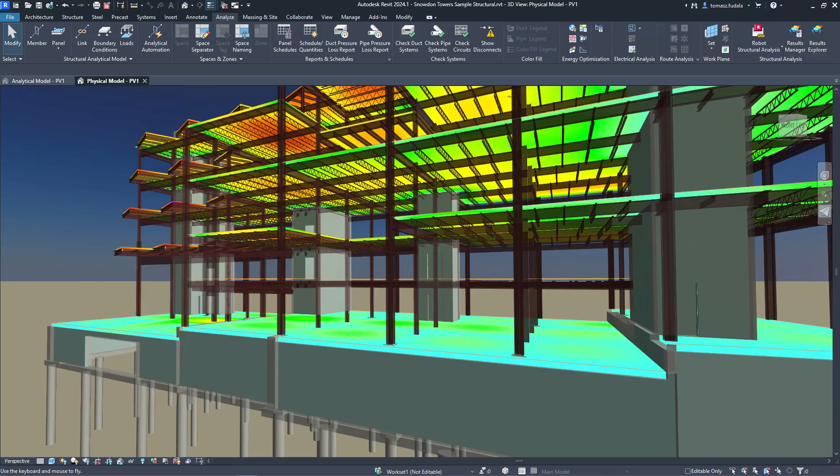As more and more structural engineers connect to and embrace building information modeling workflows, there is increasing demand for analytical collaboration in BIM. Structural analytical modeling in Revit enables engineers to coordinate across physical and analytical models and drive BIM-centric analysis workflows within Revit.

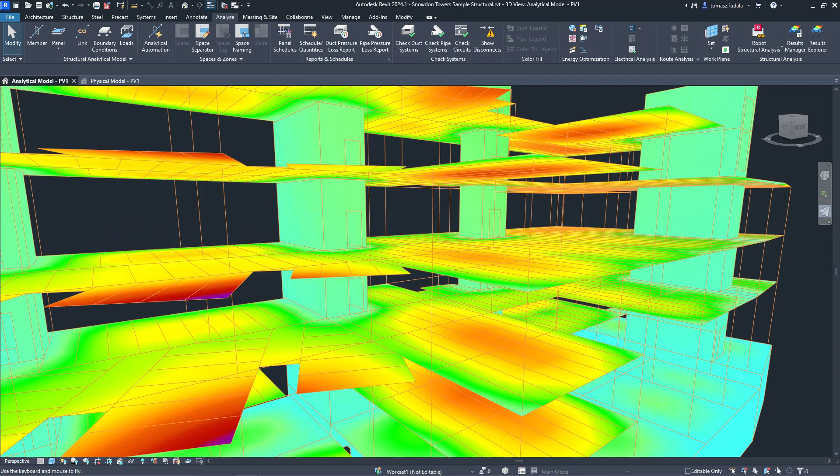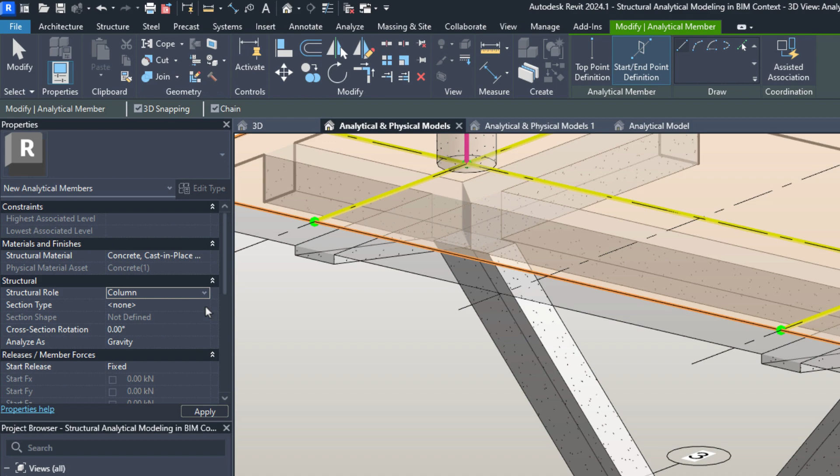In Revit, structural engineers can leverage existing physical geometry in 2D and 3D views as context for the analytical model, and then decide the physical-analytical relationships element by element. The analytical elements are fully parametric and associated with grids and levels, enabling you to control analytical model positioning using these datums and others.

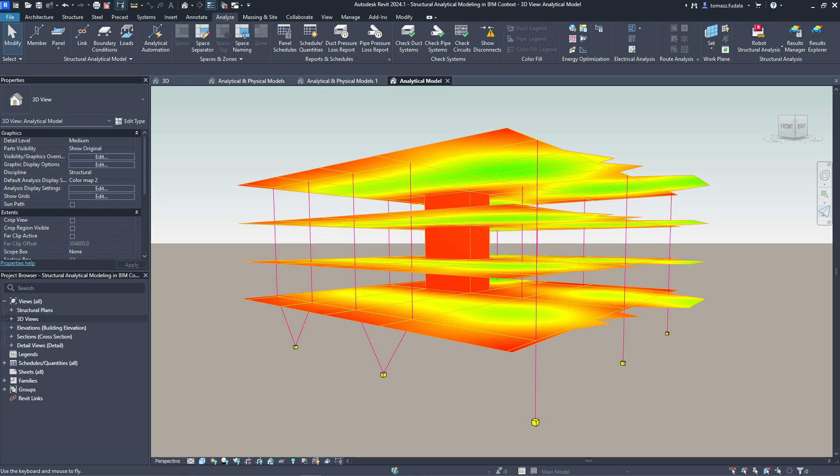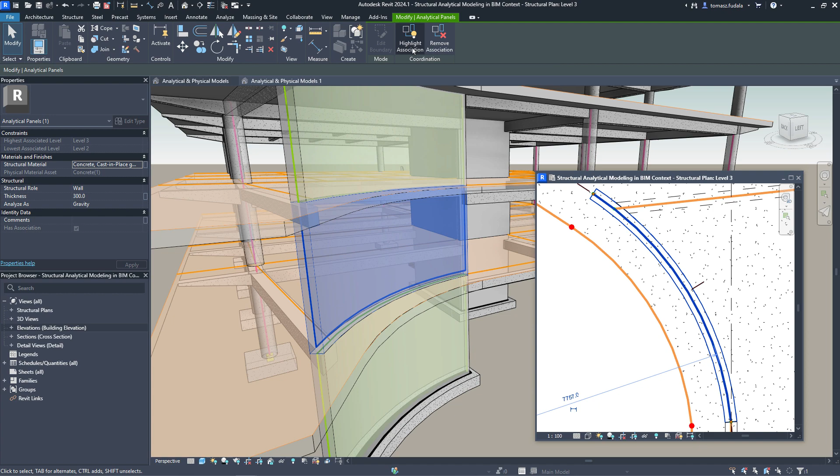When modeling analytical elements, you can assign their structural role, type and shape, define their cross-section rotation, and specify how these elements should be analyzed. To keep track of the relationships between physical and analytical model elements, you can easily associate them to each other. When this is done, associated elements can be easily located within the model, and this association can be utilized for automating synchronization of properties between physical and analytical models.

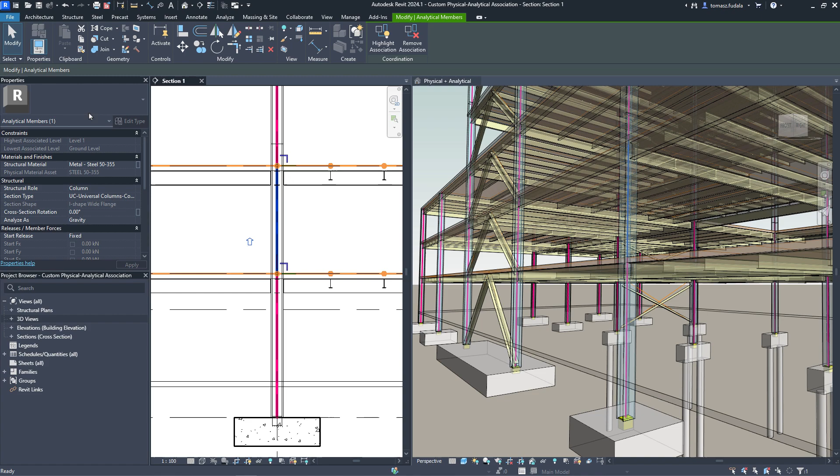Also worth mentioning is that structural engineers can associate multiple analytical panels or members to a single physical object, or vice versa. For example, several analytical panels used to represent a single physical floor, several beams associated to a single multi-span analytical member, etc. The analytical model can be associated to physical geometry, but at the same time, it remains independent, providing you with the benefits of speed and accuracy in model creation and editing while protecting the analytical model from unexpected changes.

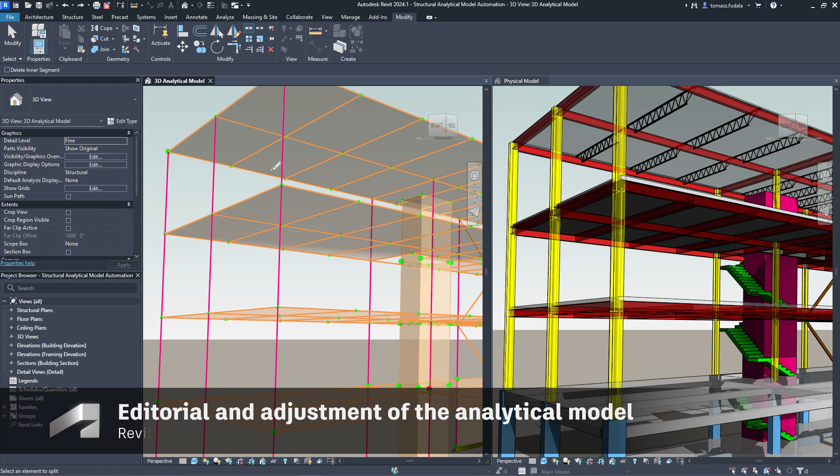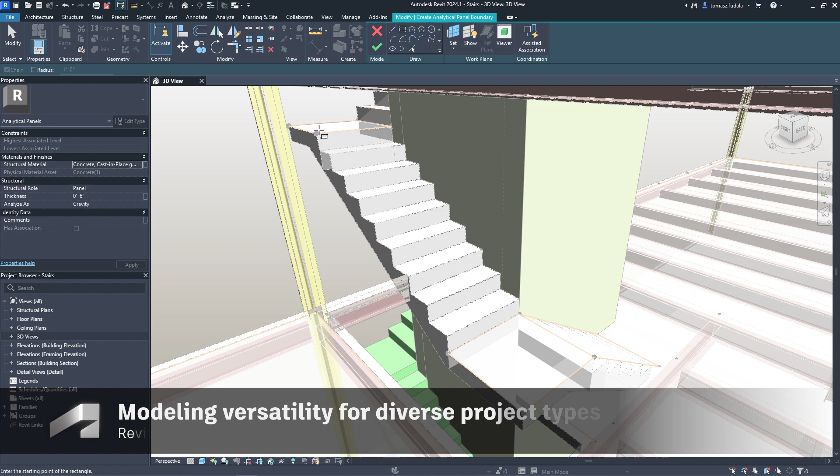Revit provides engineers with a diverse range of tools for editing an analytical model, greatly enhancing the efficiency of the model creation process. You can perform tasks such as splitting, extending, trimming elements, and much more. With the modeling autonomy enabled by member and panel objects, the analytical model can represent not just Revit structural elements, but also generic objects, roof structures, stairs, compound geometries, etc.

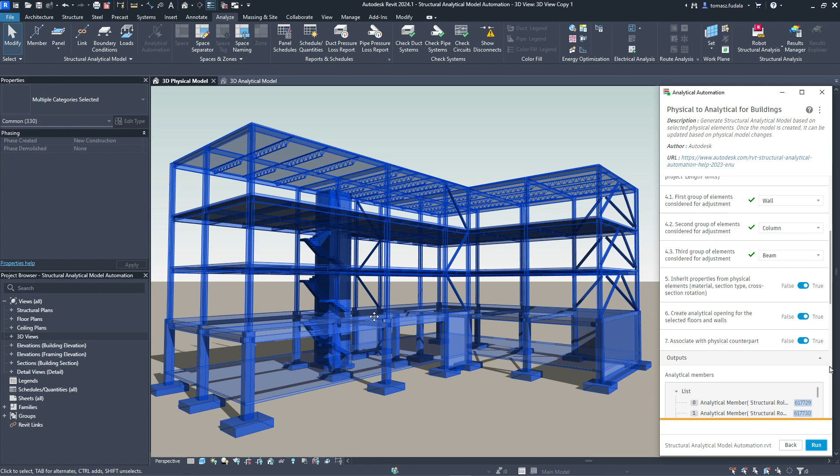Revit also provides structural engineers the rules-based structural analytical model automation. This tool enables you to generate a structural analytical model automatically from selected physical geometry and vice versa. This solution ensures that the automatically created model is always consistent and connected, eliminating the need for tedious corrections and rework.

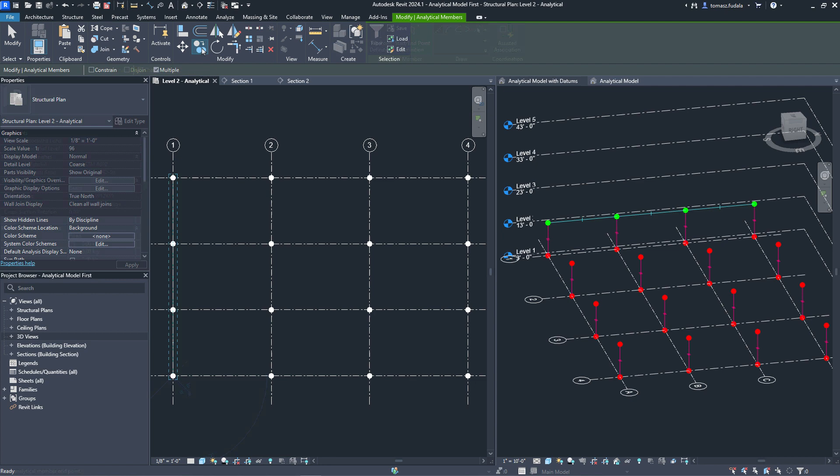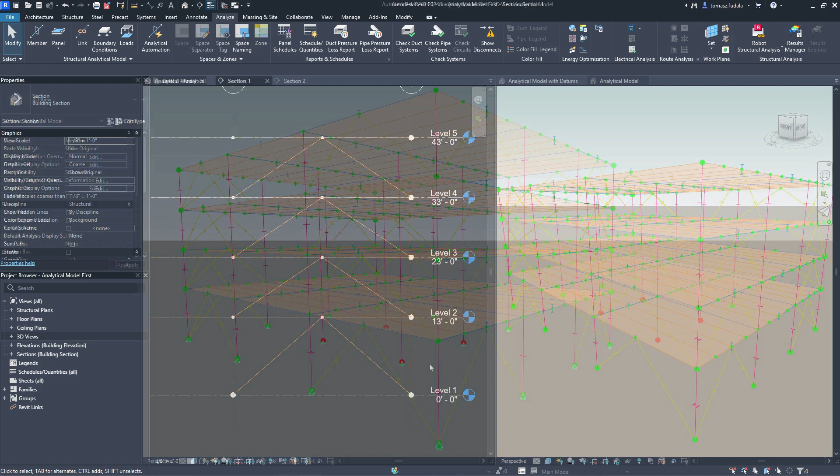As the analytical model is completely autonomous, it allows structural engineers to initiate structural analysis workflows from Revit without any physical geometry. Instead, they can start a new model from scratch and focus exclusively on aspects of analysis. Engineers can start modeling with analytical geometry and simply add physical geometry when needed for the construction documentation and detailing phases. This workflow is especially well suited and applicable to projects where engineering requirements dictate the design.

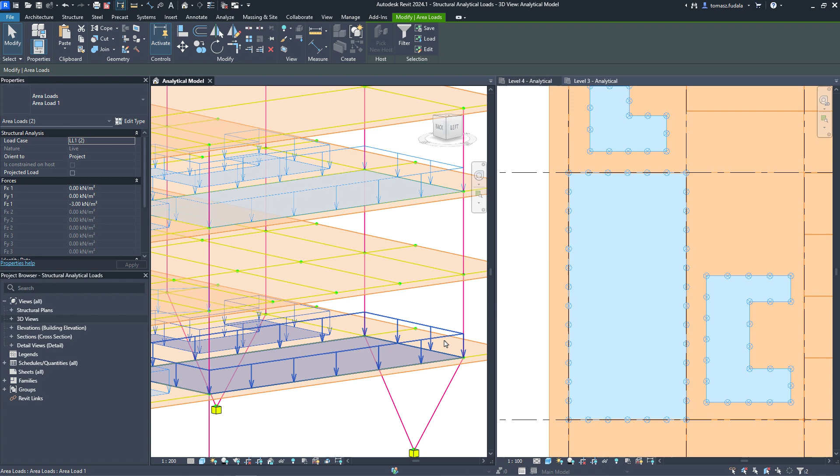Depending on the load duration and type, different natures of loads can be created. Then various types of loads such as point, linear, and planar loads can be applied to a structure and assigned to previously defined load cases. These loads can be easily and accurately applied to specific areas of panels and members or copied to other analytical hosts.

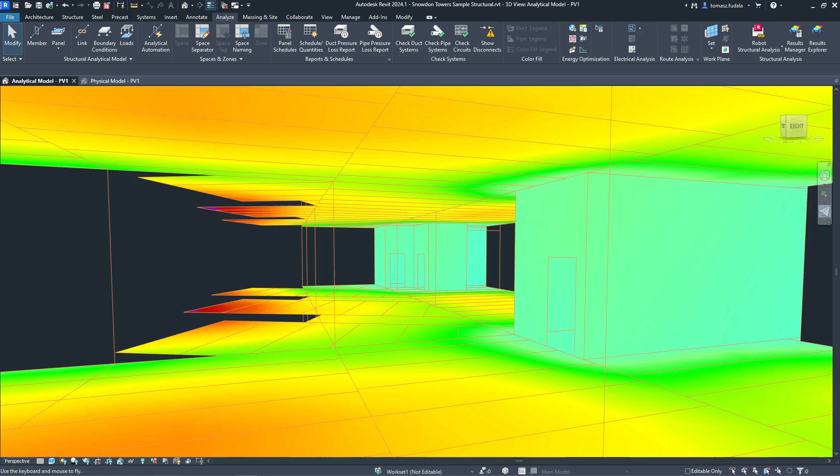Revit's unleashed versatility for defining analytical model geometry enables true bidirectional analysis software workflows and capturing edits made in other tools while eliminating modeling limitations. This BIM-centric approach to structural analytical modeling offers many benefits to structural engineers. You can more easily create representations for any type of structure: buildings, bridges, frames, pavilions, stairs, and more.

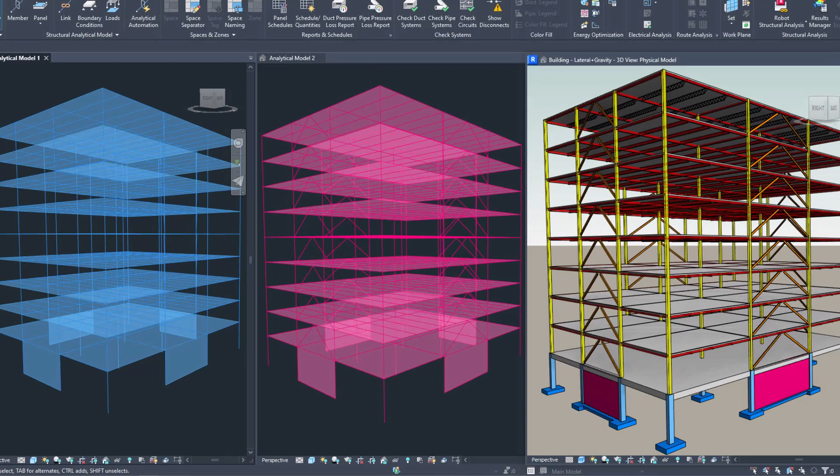You can create consistent analytical models that align with your preferred engineering approach. You can enable structural analysis jobs from Revit models. You can even create multiple analytical models for a single physical representation and consider various analysis approaches simultaneously.